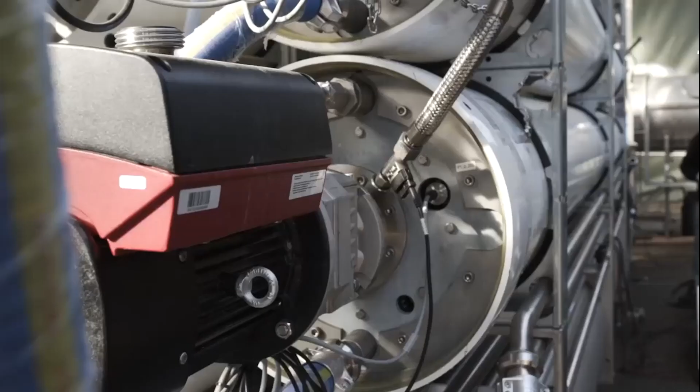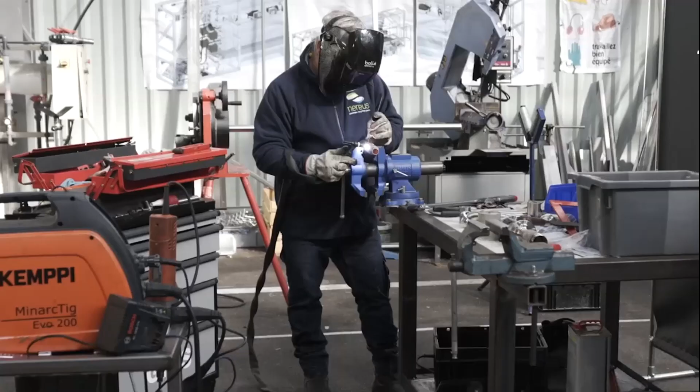For a long time, we have been managing water in a linear way, taking it in natural resources and using this water only for one usage before disposing it in natural water bodies, after treatment, of course. Now there is an opportunity to implement circular use of water, that is to say, many usage after taking only once the water in natural resources.

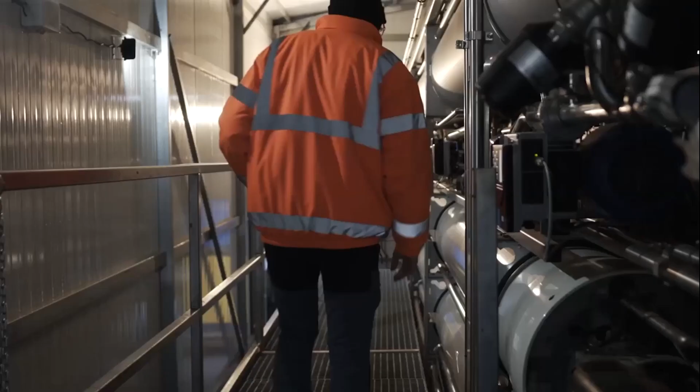And this is effectively possible thanks to systems like Nereus system, which are available at any size and can be implemented for hundreds or thousands of PE capacities.

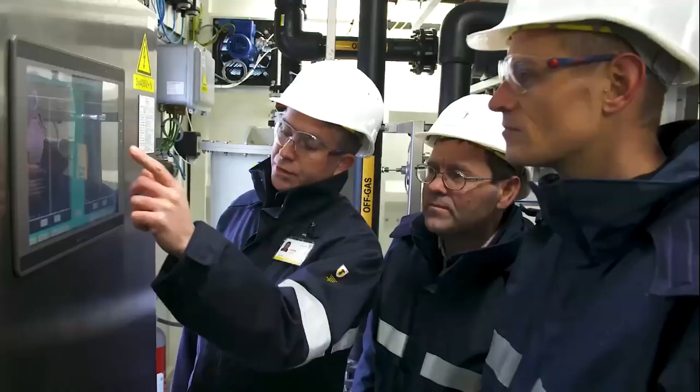At Synopsys, we develop on-site hybrid solutions to treat aqueous and solvent-based side streams from chemical and pharmaceutical production. These industries generate hazardous side streams that are not easy to process. Depending on the industry and the process, the side streams can contain toxic organics, active pharmaceutical ingredients, surfactants, metals, PFOS, endocrine disruptors.

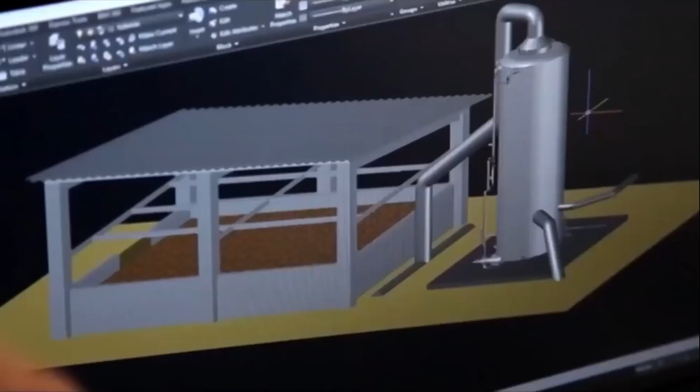We, as a part of the world, buy products like clothes, food, or cars that the industry produces. During this production, industries produce waste that goes to the atmosphere, rivers, seas, and so on, generating a negative effect on nature. What we do at AIS is remove or transform this waste into useful things through biological technologies.

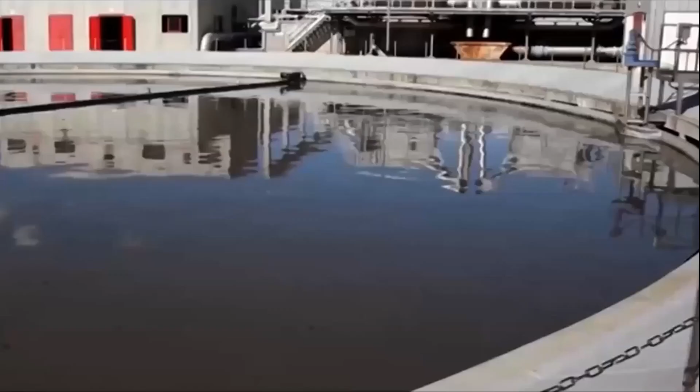This is a very efficient and ecological way to remove these hazardous substances from the environment. This way, we can clean the environment, assuring safe and healthy air and water for all.

From our point of view, a society that wants to fight against climate change must go through the circular economy, in which nothing is wasted and everything is valorized, mimicking the cycles of nature.

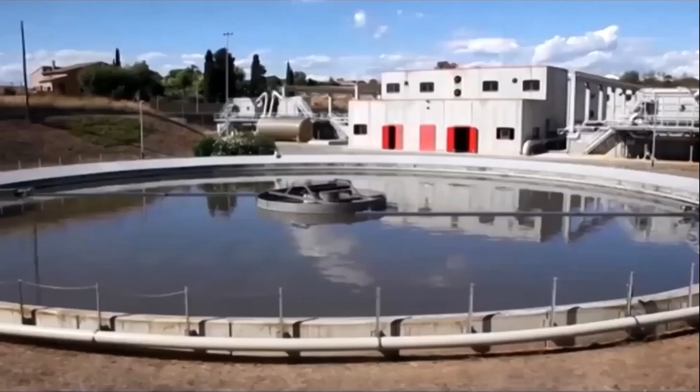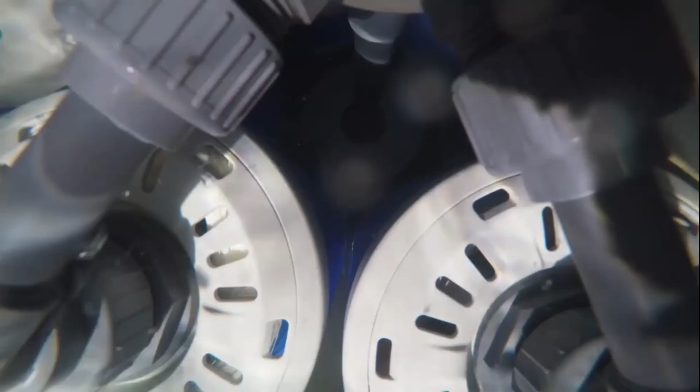We were able to develop a new water recycling kit, the Aqualoop recycling kit. This kit consists of several components, such as the ultrafiltration membrane, a bioreactor, a controller unit, and so on. The basis for this was the Eco Innovation Project, a European project with 3 countries: Germany, Austria, and Czech Republic.

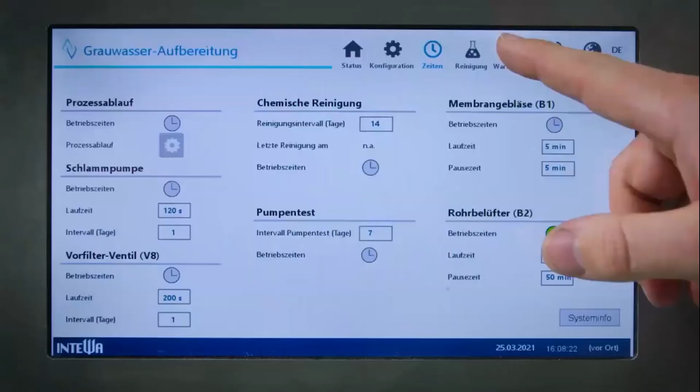This enabled us to offer different applications in water reuse: simple rainwater harvesting, but also advanced rainwater harvesting, so we can drink the water and make coffee from it. The next technology is the effluent of sewage water treatment plants, for example. We can recycle this water, disinfect and clean it, and use it for flushing toilets, garden irrigation, and so on.

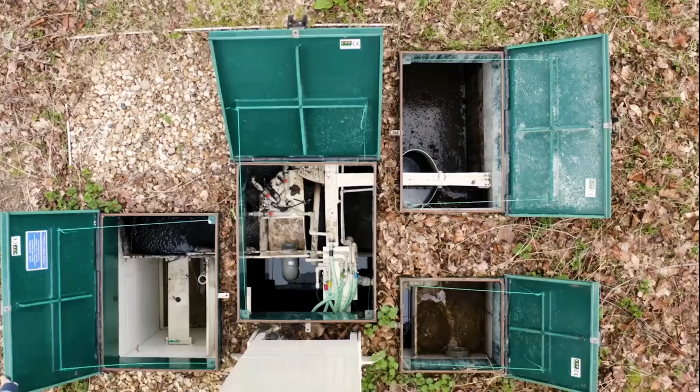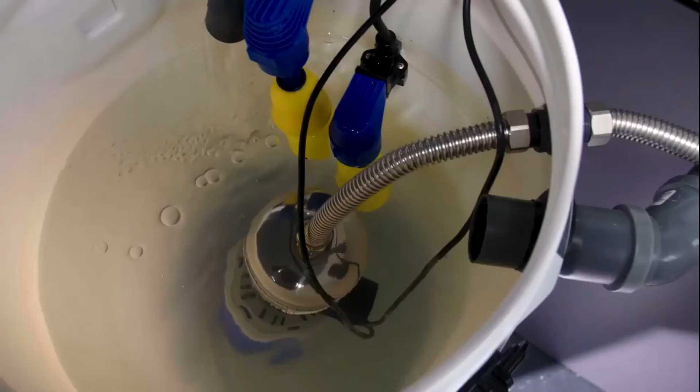The other field is stormwater management, so it's to get rid of the water. Detention systems store the water for a certain time to avoid flooding. Our idea is to close this circular approach more and more. It's always a question of price, investment, and regulations, but it's possible right now already, which you can see here in the building. We have installed a lot of components and technologies to become more or less self-sufficient. Altogether, our building is an example of circular environmental working.

During this webinar, we will show how research results can be transferred to industry, and then we will feature good practices of SMEs from different European regions. They are closing the water circle in different applications. As water is a transsectoral topic, we hope to inspire many of you.

I'm really looking forward to hearing in a little while how these SMEs that we have just seen will contribute to solving the challenges of climate change, like water shortage, flooding, and everything connected to climate change.

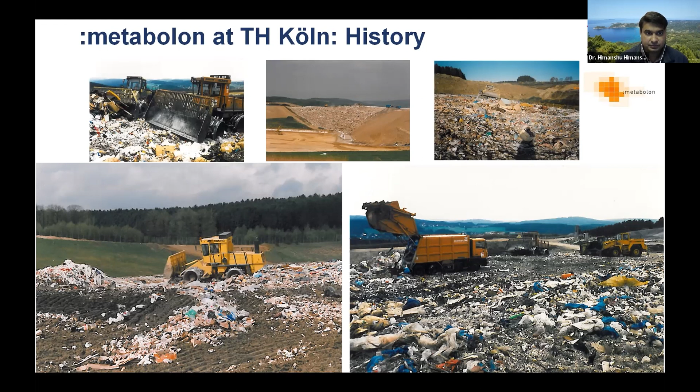So a bunch of very smart and visionary people came together, including scientists, administrators, people from the local municipality, and also politicians. It was decided that we should use this landfill site as an opportunity rather than a problem, and convert it into a place of learning, a place for research, a place where industries can collaborate, and transform it into something which is not an eyesore to the people, but where local residents can proudly say, okay, we have this site, which is really wonderful.

And the end result was, you can see this. In my opinion, this sits very well with the local viewpoint. It's not an eyesore anymore.

So what we have at Metabolon, starting from this site: Metabolon is a site where we are not landfilling the waste, but we still accept all the waste. The waste comes in here, it's source segregated. All the organic waste goes into either the biogas plant or the composting plant. From the biogas plant, we make electricity and sell it to the grid.

Then if you see here, here are all the research buildings located from the Metabolon Institute of Technical, Cologne University of Applied Science. Then here is the biogas plant, and here are other big places to sort out the waste.

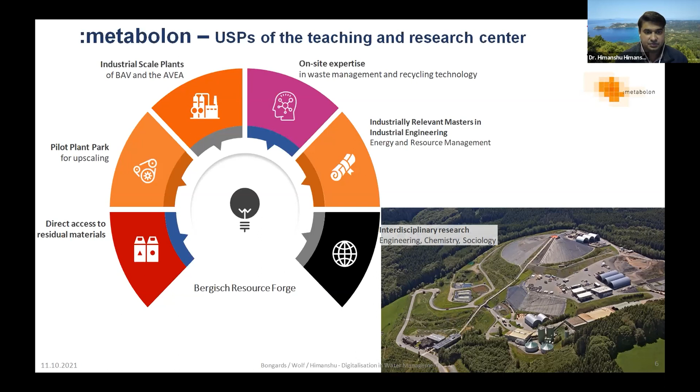The first 2 steps are setting up the basics, where you install the hardware, different kinds of sensors to collect the data, and also install some kind of network to collect all this data so it can be sent to a central repository. The next step is to observe the data, where we measure what's happening - temperature, turbidity, pH, all sorts of different parameters.

The further step is to understand why it's happening - if there's some change happening, what's the reason behind it? Based on the above 2 steps, we can build our prediction models, which will predict what will happen in the future. The final step is when this model has been developed, has run very well, and has observed a lot of data, we can give complete responsibility to the model, where it can take all the data in, predict itself what's going to happen, and also take the steps, at least the preliminary steps, to solve whatever problem is being predicted.

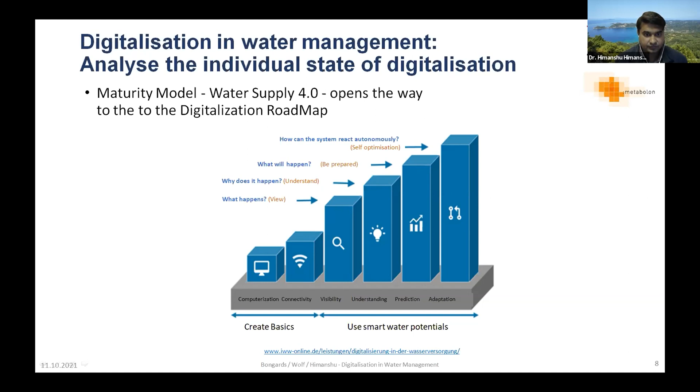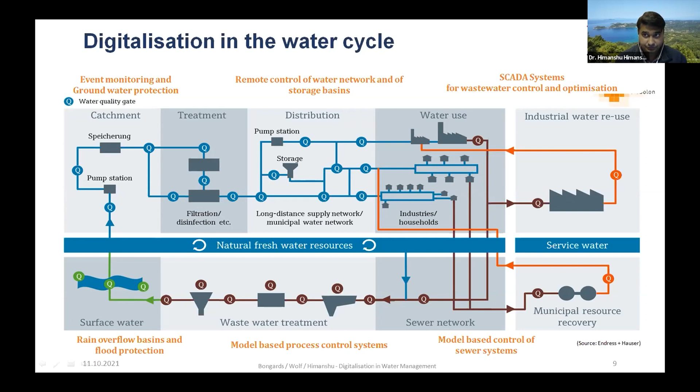If you notice in this image, there's a lot of Qs mentioned everywhere, and each Q has the potential to collect data. One of the biggest problems is that 97% of the data collected remains unused. This could be due to several reasons, but the two big ones are: first, there is no long-term aim about how we will exploit the data, and second, the data collected by sensors is not stored in a central repository.

This was the biggest problem when we conducted our European project called NRW, where we wanted to develop a strategy to standardize the wastewater treatment plant. The problem was the data was not collected at a central repository, so most of the time went into collecting this data instead of making any use of it.

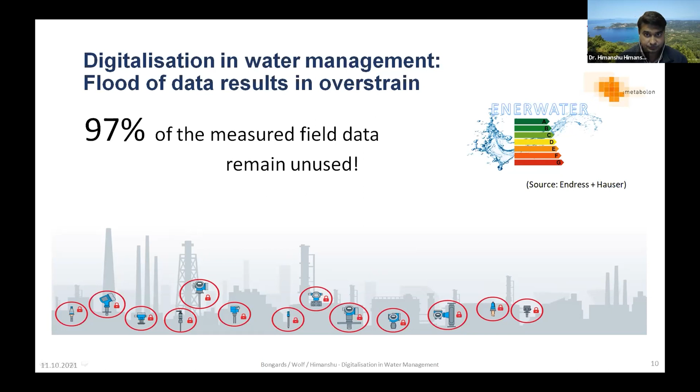Now I'll give you a brief overview of two projects related to digitalization in the water sector. The first one is IMProvT. In this project, our research group, along with the industry partner, developed hardware for the collection of data related to water quality. All this hardware was deployed at a water treatment facility in Thuringia, and our group developed a connectivity solution as well as prediction models for events that can occur in the field.

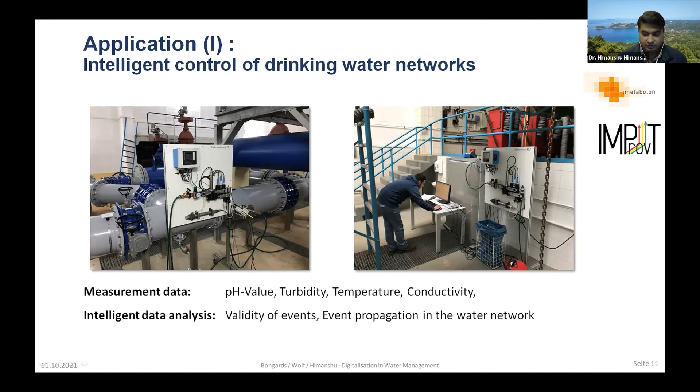The end result was a very nice web-based data representation where a user can see what's happening in real time, as well as if there is an event, the model can predict if it's just a fluke or an error in the data, for example a sensor malfunction, or something a plant operator should physically go and look into.

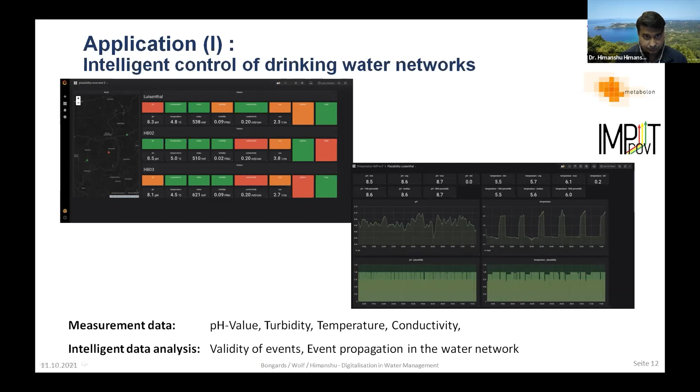The next example is a project we recently conducted with the municipality of Bergisch Gladbach, developing a prediction model for water leakage. If you look here, in the left image, if there's a large scale water leakage, it's very easy to at least locate and identify the problem. It might be very difficult to fix, but within a day or two you will notice it.

However, the big problem happens when there's water leakage at a very small scale. For example, if you see in this image, that's a real pipe, and a little bit of leakage was happening from it all the time.

So the aim of our research group was to develop a prediction model that can take multiple streams of data, including the water flow rate, the geographical location, and the age of the pipes, which was later identified as the biggest factor, along with many other factors, such as the temperature cycle and environmental factors within that region. The model we developed took all this data as input and can predict what's going to happen in the future with a certain probability.

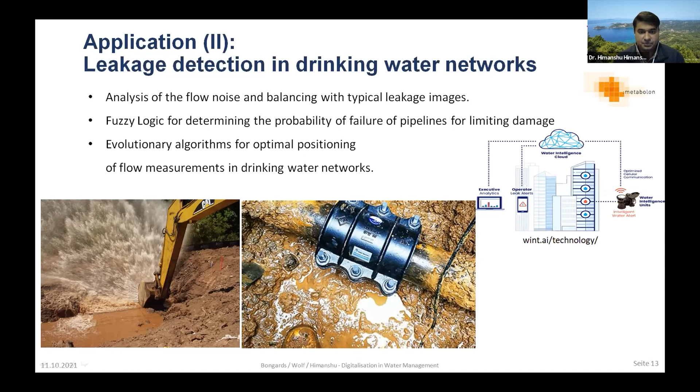For at least 20 years, our research group has been doing different kinds of projects related to water, especially the digitalization of water. Recently we entered into a collaboration with the Competence Centrum KDW, which is Competence Centrum Digitale Wasserwirtschaft. This center is originally located in Essen; however, since we entered this collaboration, they are going to set up a new center in Gummersbach, which is very close to the Metabolon research facility itself.

We're going to focus on four core areas. First, monitoring: all different kinds of sensors, the maintenance of sensors, and everything related to the monitoring of water and water quality. Second, knowledge management: documentation and communication of all the data we have collected and all the reports being generated. Furthermore, we'll focus on networking, with environmental and customer data.

The aim is to provide all the data available on the web. Also, we'll look into cybersecurity and cloud storage solutions, and how we can save and preserve the data from hacking or unauthorized access.

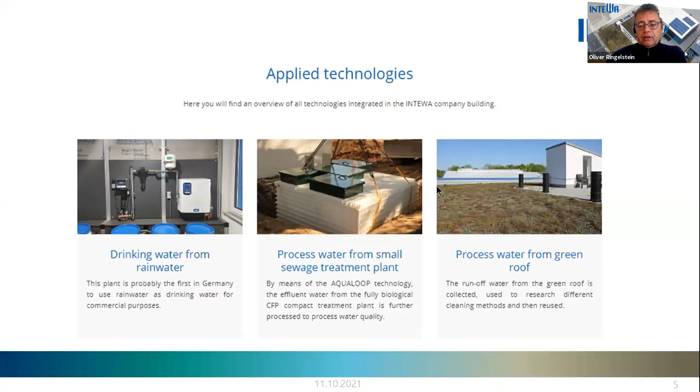We have a green roof, and we catch the water from the green roof. Of course, most of the water evaporates, so maybe 30, 40, 50% is caught in the rainwater cistern and reused. Here we have some problems with color, so we remove the color with oxygen and different processes to get clear water to use again for different applications — in our case, only irrigation.

We have stormwater infiltration, of course. This means the water from the surface is collected and infiltrated and stored to avoid flooding.

We have a PV system of around 20 kilowatts, which is sufficient for our whole building's energy supply. It's a small system, but with some other technologies it is possible. For example, the heat exchanger, which is very important to my mind — we can save around 50 to 70% just by using the heat from the building, heating up the cold air from outside.

We have a home automation system installed. This means you don't need to press any switch before you get light — everything is automatic.

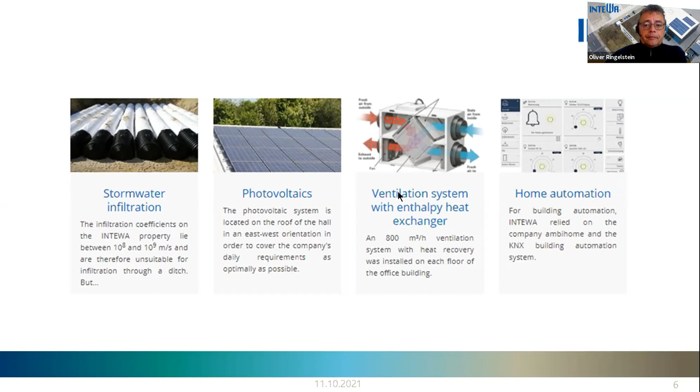We have the heat pump, of course, and with the heat pump, as you all know, you can save a lot of energy. We have floor heating, which is the basis for good efficiency for the heat pump, but also for cooling — so in summer, if it's 40 degrees outside, inside the building it's always 22, which costs nearly nothing because we simply use our source outside. We have two deep bore wells, and we can use that heat for the heat pump. You can see the deep drilling, and we have unsealed traffic areas, meaning all the water we don't need is infiltrated on this area.

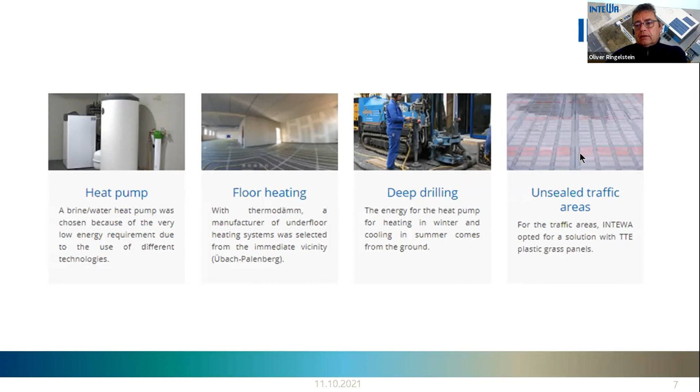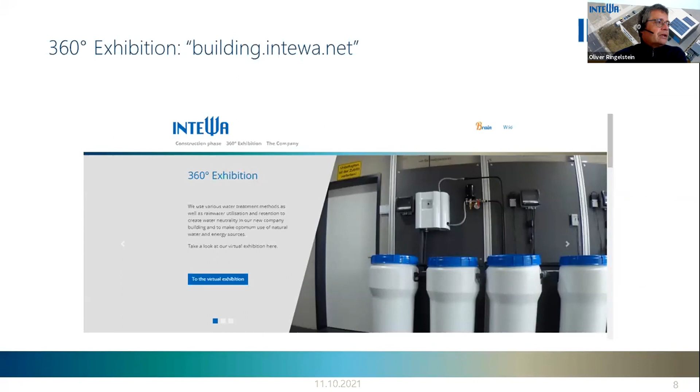Now I'd like to take you with us on a little tour through the building — you can also do this yourself. Here is the web page for the building: building.intewa.net. If you go to the web page, you can learn about the building and see pictures of the construction phases. It's quite interesting. There's also a 360-degree exhibition with pictures you can walk around in. Here you can see the drain max infiltration tunnel.

Normally, of course, this is buried. And this is an older picture. So today we have the sealed surface here, the unsealed surface.

Underneath here, you can find the GRP tank, a 30 cubic meter tank to collect the rainwater. And yeah, this is the office building. Over here, you can see the stock, the warehouse. So when you go into the building, you will be directly into our plant room.

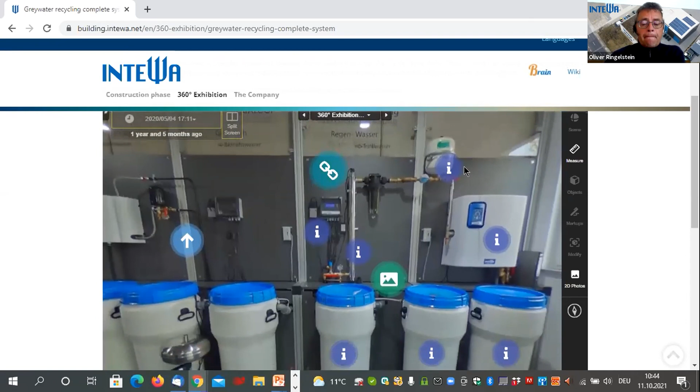This is suitable for research and development. We have different pipe work grids installed in the building, so we can connect different pipes to different applications. On the right side, you will see our potable water from rainwater system. Here we are working with ultrafiltration membranes.

You can have a quick look into the tanks. On the left side, you can see the membranes. On the right side, you have the clean water. Then the water is pumped by these rainmaster units, frequency controlled, through active carbon and UV disinfection into the building.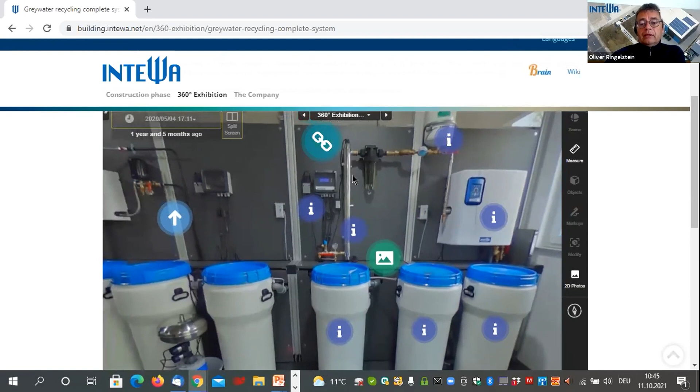This means if you have a coffee, tea, or whatever in our buildings, then it is made of rainwater directly. In the middle, we have the plant for the reuse and cleaning of the effluent of the roof. Here we're working with a new membrane technology to clean the water, to get rid of the color and so on.

On the left side, we have the process water, so-called process water from the sewage water treatment plant, which is, for example, quite easy to recycle and very suitable for toilet flushing, washing machine, maybe garden irrigation.

So then the last step here, because probably the time is running. You can see our grey water recycling system, which is not installed, but soon we will install the so-called multi-loop system, which is a grey water recycling system. You can shower again and again with the same water.

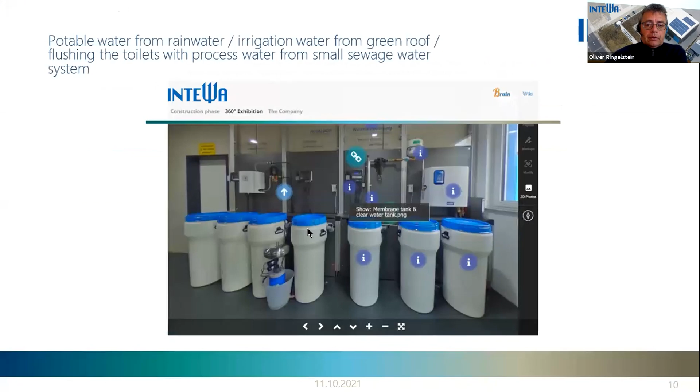During the last years, some findings: being water self-sufficient and energy neutral is possible for a lot of buildings today already, and it's much easier than expected, and it's not as expensive as most people are thinking. So it's mandatory, to our mind, to do it.

Systems have a low maintenance effort, they're easy to handle. We are reaching the highest water standard, and with rainwater we are reaching much better water standards than a lot of potable water you can get in different countries. As I mentioned before, technologies are affordable and often have a very good return on investment, especially if we talk about grey water recycling, because they have a small footprint.

The main barriers we're having are the local regulations and existing structures. This is what we have to do something against. But more and more utilities and countries are supporting decentralized water reuse solutions today. So this means we are on a good direction.

To our mind, for any new building, it's absolutely mandatory anyhow, but also a lot of retrofit possibilities—we are seeing this in the building market. Our future goal is to fully close the water loop. These are the projects we are working on. Everybody is invited to visit us and to work together with us.

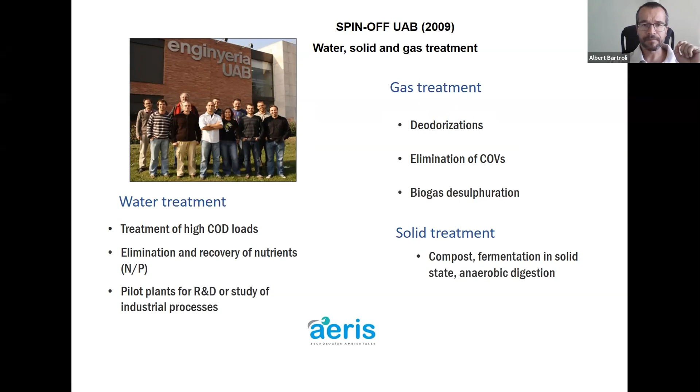Our solutions are mainly biological solutions, and the ones I'm going to explain are a clear example of circularity. Aeris was established in 2009. We are a spin-off of the Universitat Autònoma de Barcelona. There are many environmental engineering companies, but few are able to deal with water, gas, and solid problems. The knowledge of these three vectors gives us a wider solution that allows us to find more integral solutions. By our origin, we are highly committed to research.

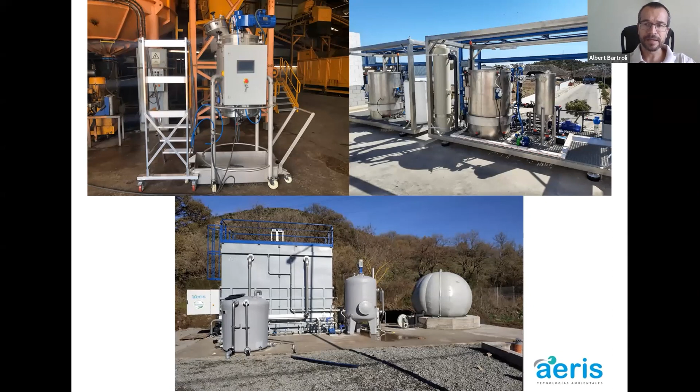These are some of the ongoing EU projects we are involved in, and here you can see some pictures of the equipment that we are applying in some of these EU research projects.

Talking about the topic we have to explain, it's like turning wastewater treatment plants into biofactories. As you will see, some of our solutions are a clear example of this.

The first example is the odor problem in wastewater treatment plants. With our technology, it's a biological solution compared to the chemical traditional technology - we don't use chemical reagents to solve the odor problem. The only thing we need is the effluent from the wastewater treatment plant. So with only the effluent, we can solve the odor in this plant. This is a clear example of circularity to solve problems in these facilities.

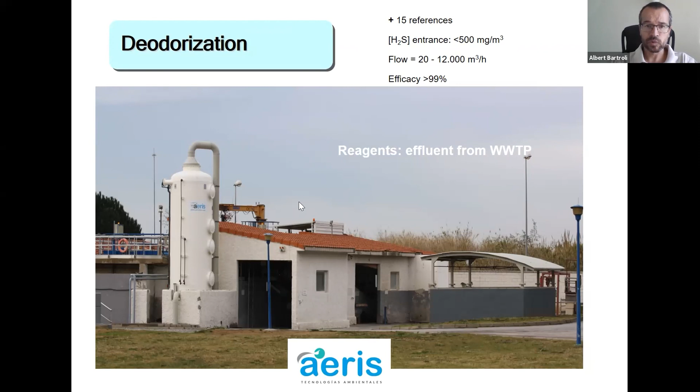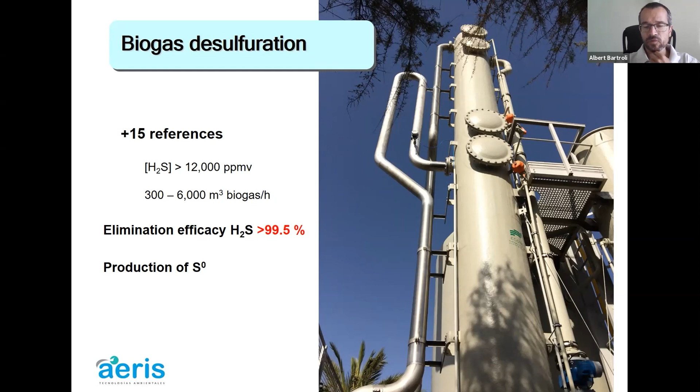Another example I would like to explain is the solution we can apply for biogas desulfuration. With a biological solution, we apply a partial oxidation of the H2S to produce elemental sulfur, and this elemental sulfur can be applied as an agricultural nutrient. This biological solution is a very interesting way to face the problem of biogas desulfuration.

The third solution we're going to explain is VOC elimination. Traditionally, this pollution in the air is treated through a regenerative thermal oxidizer, RTO. This technology consumes fossil fuels and generates CO2 all the time. With the biological approach that we supply, we have a minimal impact on the environment.

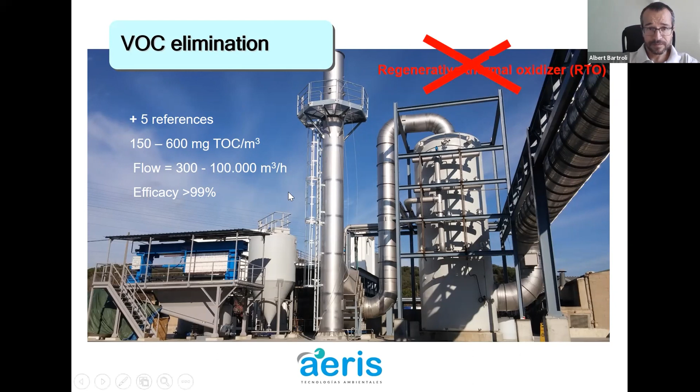Another example, changing the topic a little bit, is about solids management. It's a very interesting solution we found, like in a wastewater treatment plant in Pineda, a city 60 kilometers north of Barcelona. This facility had two anaerobic digesters, but they were oversized.

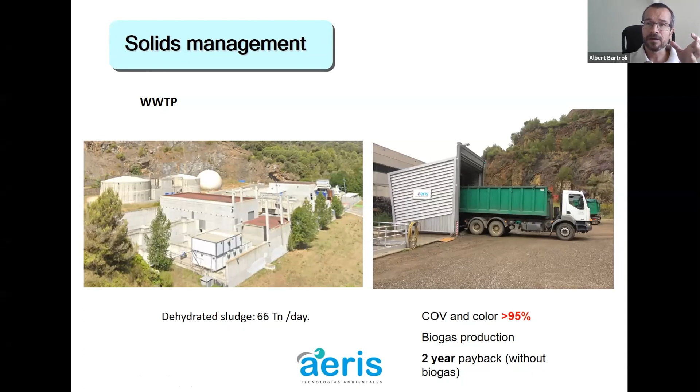So together with the local administration and the company responsible for the exploitation, we first studied and then applied the possibility of sending dehydrated sludge from smaller wastewater treatment plants near Pineda. These smaller plants didn't have anaerobic digestion, so by sending this sludge to the much bigger centralized wastewater treatment plant in Pineda, we could transform this waste into biogas and also reduce the volume of sludge generated. The payback of this investment was smaller than 2 years.

The last experience I would like to explain is that in a paper industry, we could transform the glues and inks wasted into biogas through an anaerobic membrane technology. This solution also had a very short payback.

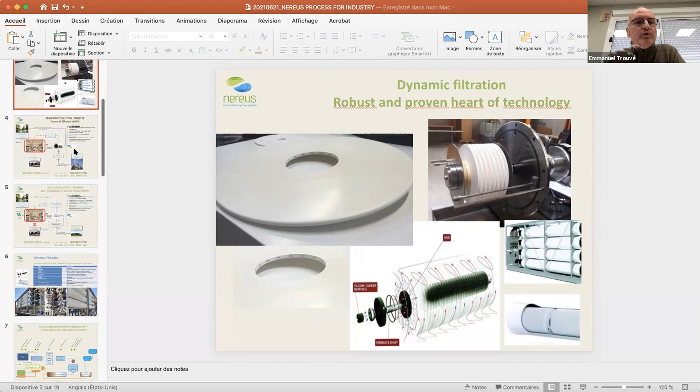I would like to compare the two approaches. The classical treatment approach we have is usually to get water for an industrial use. This is a real case we have of 300 cubic meters per day water consumption for this industry, and the normal loop is to treat this wastewater and dispose of it into receiving natural water bodies after appropriate treatment, of course.

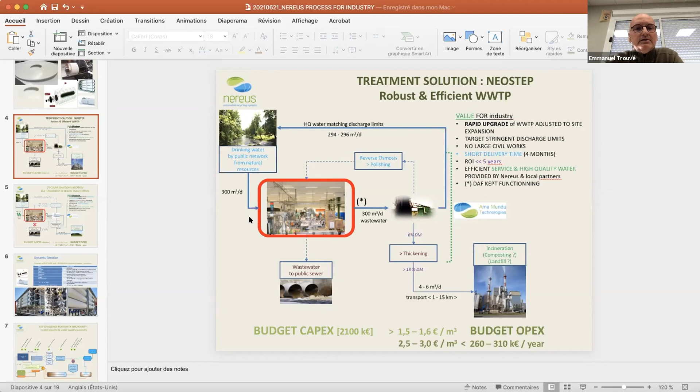The difficulty is that it's a linear use of water, a large water cycle, and that is a case we have now. What we propose is to have a local or on-site loop, recycling almost 80% of the wastewater, which drastically decreases the water uptake from natural resources. You can also go to zero liquid discharge, but of course you have to manage the concentrate or co-product you get out of this water recycling loop and value it.

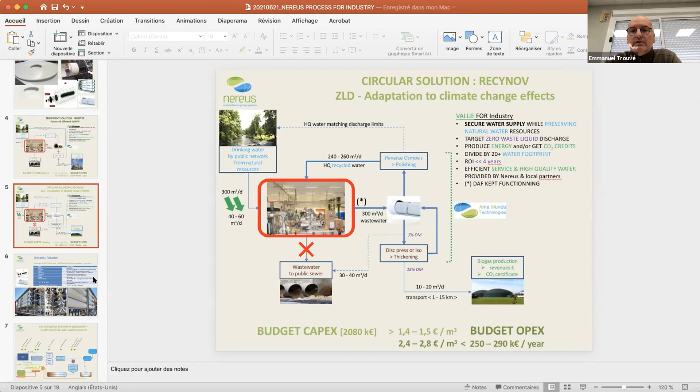The systems we have are highly modular and flexible, like this example here with this mobile unit that can help with demonstrations or services. You have the disc in these white tubes, and underneath a heat exchanger. So at the same time we recover water and we also recover heat out of the wastewater.

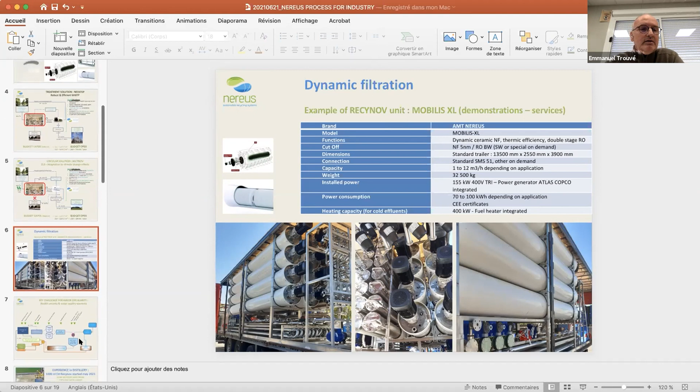Something that is key in doing this is to secure the health, the sanitary aspect of the water. I don't want to go through this scheme in detail, but just to show you that we can study case by case how to secure the sanitary aspect of the recycled water.

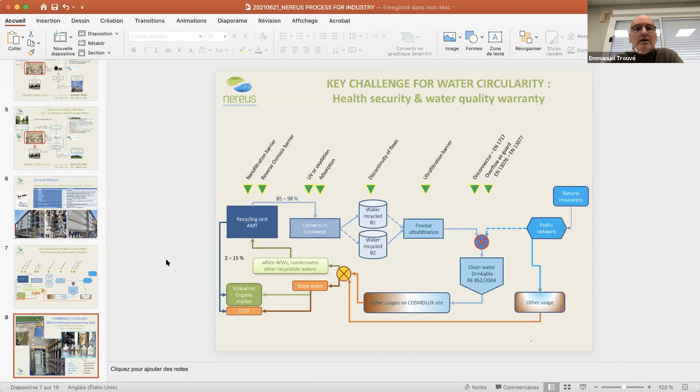Here you have an example of a distillery in Martinique, in the Caribbean area, where they used to treat their wastewater in lagoons, like you see on the top left. We substitute their big lagoons - the capacity is 1,000 cubic meters per day with only 4 containers. It's a very compact installation. You can see the installation inside.

This way we are able to convert their liquid wastewater, called vinasse, into clean water. More than 80% of this volume is converted into high quality clean water that can be recycled upstream to wash the inlet sugar canes in the rum process. The two concentrates from the ceramic disc rotating disc stage, and from the polishing stage, are directed to a neighboring composting unit for fertilizer production, fertilizing sugarcane fields.

So there is no more need for a big wastewater treatment plant or big lagoons. They also save a lot of space and room to develop their activity.

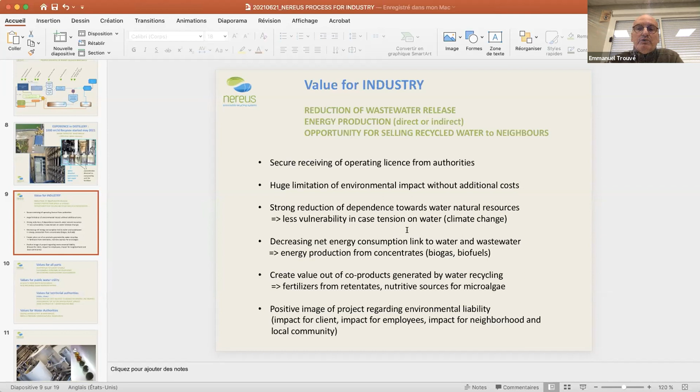So we can say that there is a lot of value for industry moving from wastewater treatment to wastewater sorting - I would say wastewater cracking - into clean water and other ingredients, and especially for climate change adaptation, they can get much less vulnerability in case of tension on water, such as authorities reducing water access. So I would say that all the stakeholders have something to gain in such an approach.

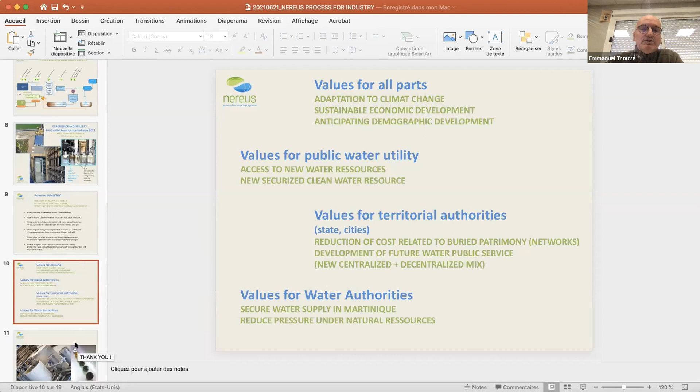It is listed here what is the value for public water utilities, for territorial authorities, for water authorities. So it's clear that circularizing the water management has value for all stakeholders. I will be happy to give you much more details and information. This is also applied in many food and beverage industries, like dairy industries, and we will also be happy to arrange visits to those sites with you.

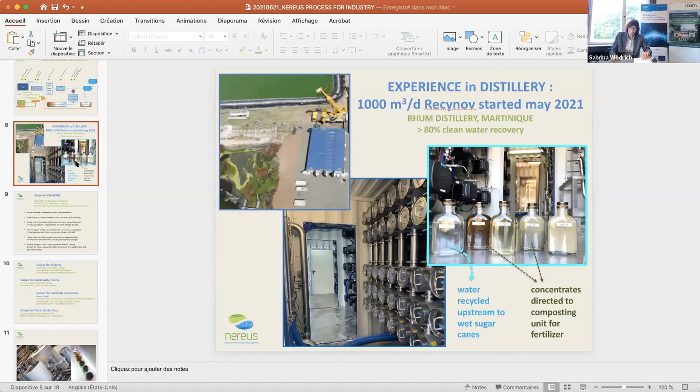We already come to the final presentation of the SMEs. As we just heard from Oliver Ringelstein, it's not very far to Belgium - Flanders is just around the corner for us. We have a lot of chemical industry here in North-Rhine-Westphalia, as you will know, Steven. So we're very curious to hear about what you can do about chemical side streams, and we look forward to your presentation. Thank you, I will try to share the screen.

So you should see the screen now. I hope so. Can you see the presentation? Yes, it works fine.

Very short, in a few minutes, not enough time to explain everything, but I will do my best to give you a little bit of a flavor of what we can do. I'm Steven De Laet, founder and CEO of Inopsys.

So what we do is we focus on some of the industry challenges. We already saw some challenges in the area of wastewater treatment, and also the challenges with recuperation of water. But some of the streams we often forget are the hazardous waste or hazardous wastewater streams that unfortunately end up in transport and incineration.

So I'm talking about streams that contain toxic organics in general, coming out of pharmaceutical industry, active pharmaceutical ingredients, more specific steroidal hormonal components, often also forgotten are types of surfactants. Some of them are already on the ban list, but still used also. Then solvent water mixtures, too much solvent to go into biological treatments, too much water to go for recuperation or distillation. So they also end up in transport and incineration.

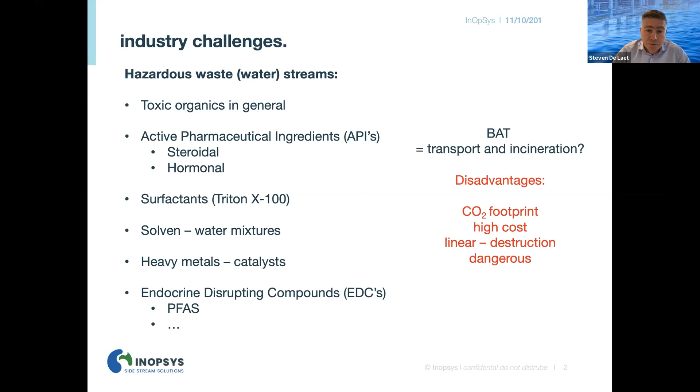So at Inopsys, we believe in circles, and we try to provide the missing link that sometimes is missed. When we saw the previous presentations, a lot of waters can be recuperated, but these harmful, hazardous waste streams are very difficult to recuperate, even with the technologies mentioned. So what we do is create a missing link so the water loop can be closed, and that certain raw materials, catalysts, solvents can be recuperated, and the pathway towards transport and incineration is totally closed for our customers.

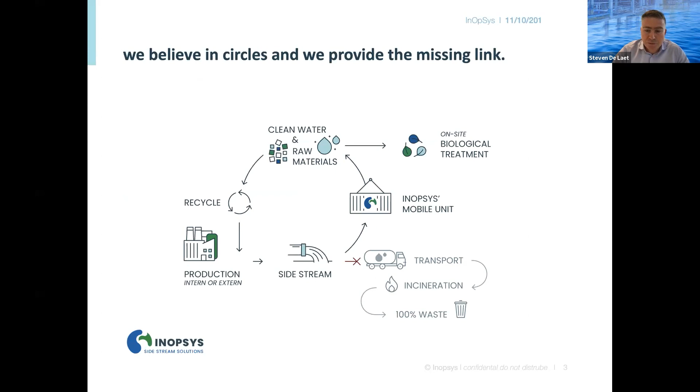We have some customer cases, very short, to highlight what we already implemented. One in pharmaceutical industry, one in fine chemical / pharmaceutical industry. So here you see two examples where we implemented an alternative for transport and incineration for a side stream coming out of pharma and chemical industry.

In one case, we recuperate zinc, a catalyst used. In another case, we recuperate palladium, a catalyst used. We create on-site purified water, and the raw material is recuperated and a value is created for the customer. So costs are decreased, CO2 is decreased, and value is increased.

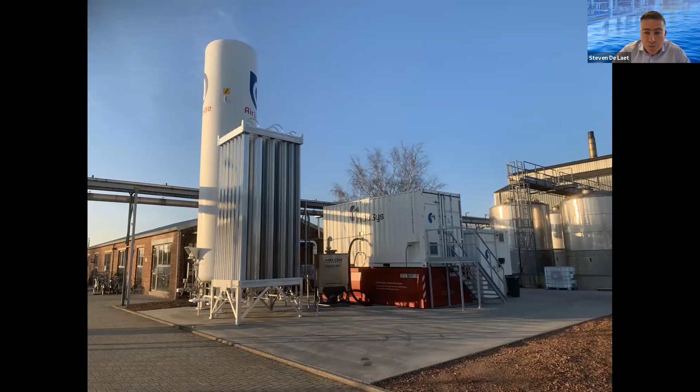This looks like this. For example, these are mobile modular units that we put on site, remote controlled, self-steered, and so on. These units can be very compact and can then avoid the transport and incineration of those hazardous side streams and can generate the recuperation.

Another case where we focus now more on the organical part. This is an API that is produced to treat prostate cancer, for example. It's a steroidal component that has to be removed to less than 0.01 ppb, parts per billion. We do this in a technology train of two technologies.

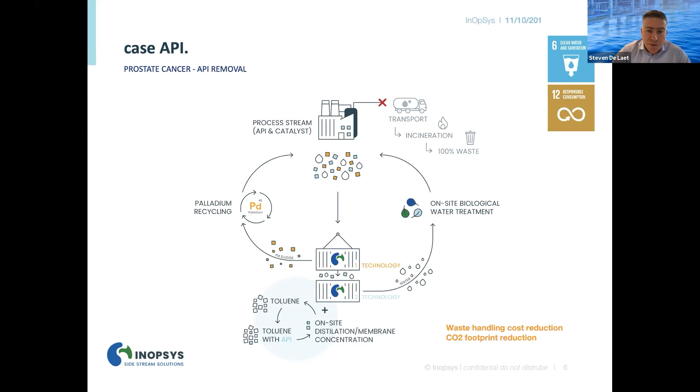Part of the technology is an extraction process where we recuperate also the solvent that is used. We can also take out the catalyst that is used, and of course the steroidal component is taken out of the water. So you see multiple circles and loops generated, and the linear transport and incineration line is closed. So the customer stepped away from this approach, has a cost reduction and a more sustainable process on site, and can go also for water reuse.

And this looks like this. It's plug and play. We use the existing infrastructure where the trucks are loaded to go for transport and incineration. We put in our units, ATEX, zone 1, zone 2, everything is possible in production and loading areas. In this way, the transport is eliminated and the reuse is done on site.

Another very hot topic is micropollutants, but more specifically pharmaceuticals in the environment. To be correct, we have to mention that 90% of this is generated and caused by patients, not by the industry. But the industry is aware of their part of the problem.

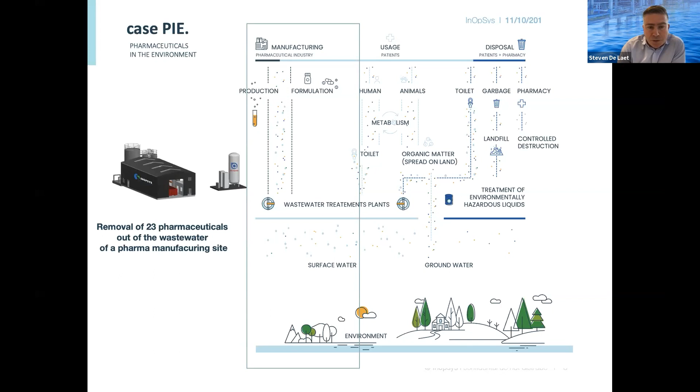In this case, we developed for a pharma company a total solution to remove more than 23 different APIs altogether out of their wastewater to make them pharma-free. I think this is quite unique.

You see here an example of a bigger unit. It's still modular and mobile, but we've chosen to put it in a closed environment. Here we use, for example, advanced oxidation techniques combined with other techniques, because it's a very complex wastewater, to make this site totally pharma-free.

So what we do, in a nutshell, to close the presentation: we provide mobile and modular solutions on site, capex-free. We do the investment, the customer pays per use. We create, in most cases, a circular economy approach, in that raw materials and water can be reused.

Very important compared to other mono technologies is selective removal. You don't have to remove everything, you have to remove the problem-causing component. As we already saw in the previous presentations, if you do this, there are other techniques in wastewater treatment that can be used to create purified water and to recuperate it.

At the end, what we do is design, build, finance, operate, maintain. So we take care and unburden our customers in this quite challenging topic. Of course, we help them achieve the Sustainable Development Goals. Thank you for your attention, and if there are questions, I'm happy to answer them now or later.